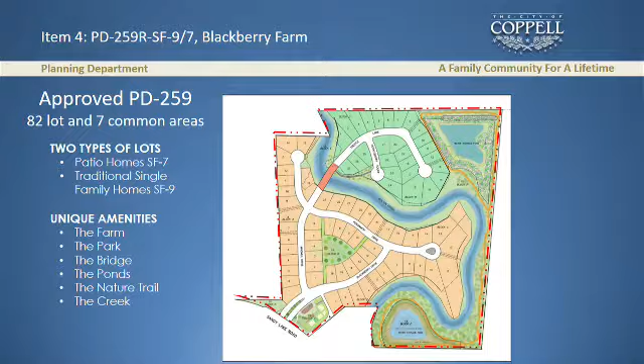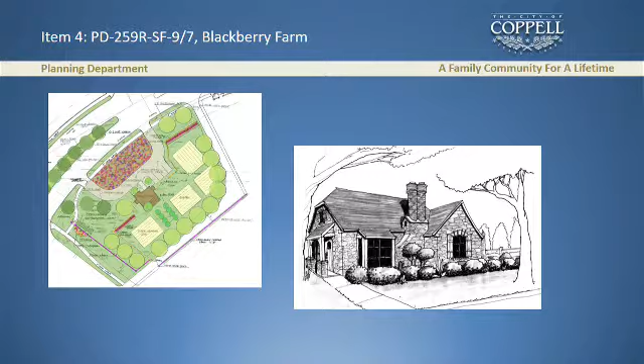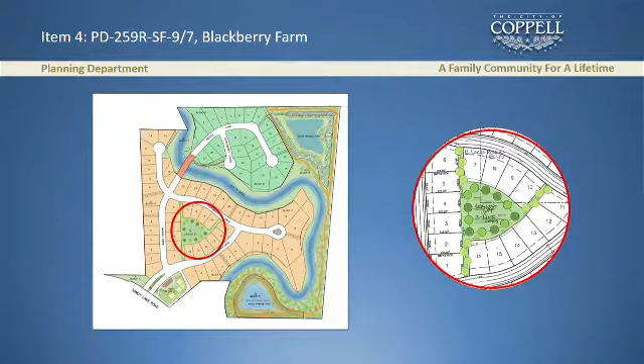One of the key entry features of this development was at the entry right at Sandy Lake. There's just over an acre of land where there was going to be a farmhouse with gardens and limited parking. That proposal is part of the current development and needs to be attached to that. Another part of the existing development being brought forward is another focal point in the middle of the development - about an acre of land, which is going to be basically a green, grassy area.

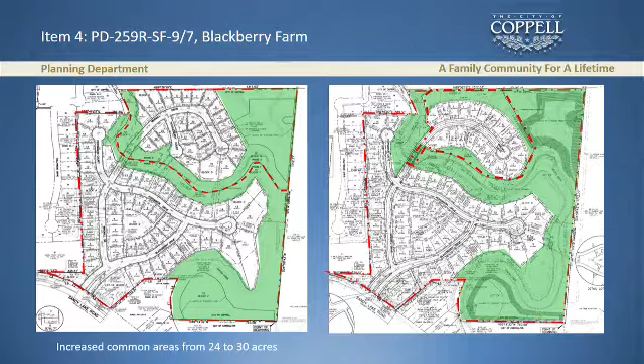Again, another significant difference is phase 2, which is north of the creek. They reduced that by 7 lots to 20 lots, and the lots are a lot larger than before because you're incorporating more green areas. There's kind of a long list of just technical minor issues that were revised with the existing PD.

This existing PD and the proposed PD - there was a requirement for 3-home separation between stucco homes. That's been deleted. There are some words about allowing for detached buildings in the front yard. I think we can work through some of the wording; I think I understand the intent of that, but it really just needs to be reworded.

The original PD had an option for rolled curbs. They no longer want those. There was a hike and bike trail that was going to be internal to the site - you can kind of see it through here - that's no longer part of the request. And we'll talk about the bridge too: it was supposed to be a dual arch bridge, and now it's going to be a single arch.

And elimination, at one point there was some discussion about a pedestrian connection between this subdivision and the subdivision to the west, but my understanding is that agreement never occurred.

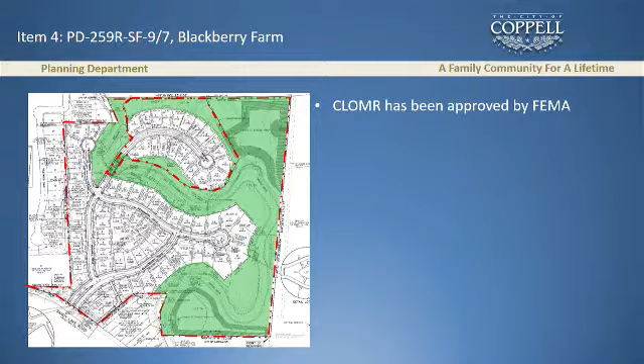So again, what's before you this evening is this detailed plan, and since we've last seen it, the CLOMR has been approved by FEMA. Basically, the floodplain study has been approved. Part of that approval, the single-family lots no longer extend into the floodplain like they were before.

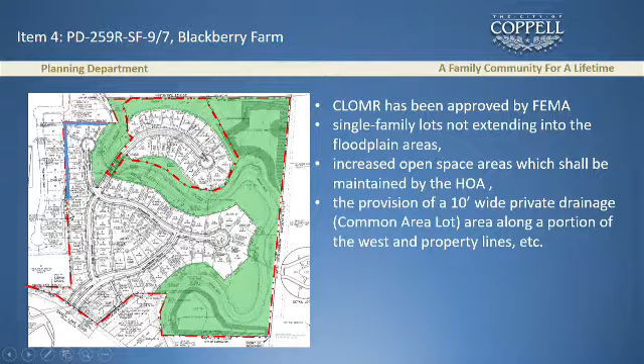As we talked about a minute ago, there's increased acreage of open space area that is going to be maintained by the HOA. Along this property line adjacent to Hollywood Boulevard, or Hollywood Road, there is a 10-foot wide private drainage, basically an X lot, that's going to accommodate overflow drainage if needed.

However, the one outstanding issue that's hopefully close to resolution is about the U.S. Army Corps of Engineers providing stream bank erosion protection. There's still some discussion with the city and the Corps on that one final issue, but zoning can move on since the plat will be held up until that's resolved.

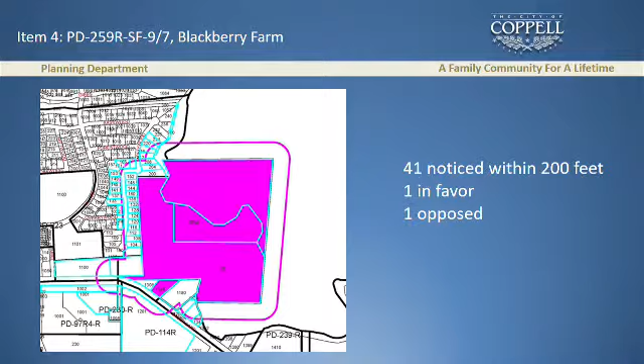This case, we did send 41 notices to property owners within 200 feet, only received 2 responses in writing, one was in favor and one was opposed. I received a couple phone calls. And then within 800 feet, we sent out 96 notices, but received no written response from that.

So that being said, staff is recommending approval of the PD 259 revised SF 7 and 9, subject to conditions as revised in attachment A, which is in your packet. I also have a slide of that.

But basically, the 3 outstanding issues was just to ensure that the entry feature common area that I showed you is attached to this PD, and that the development of that lot and the entry features be constructed prior to the issuance of a building permit for the first home, other than a model home. And then I think we talked a little bit about the hardscapes in the front yard, how we're just going to wordsmith that. And then prior to the filing of the plat for Phase 1, again, the U.S. Army Corps of Engineers approved stream bank erosion protection.

But on phase 2, there are no retaining walls, because we're just going to roll it down on a 3-to-1. I'm sorry, yeah, there's no retaining walls there, we took all of them out.

The previous PD had all retaining walls around that complete yellow phase 2. Now the new one has none, which I think is good. It's less to maintain, and I don't think there's any concern that that's going to erode. There's not, in our mind, or I haven't heard staff think there was either.

And the same thing on those 4 big cul-de-sac lots where it backs up to the peninsulas. There are no retaining walls because I think it's better if it just goes off in a 4-to-1. I hear the argument. My concern coming in, and I'll just key off, I was going to let it lie, but I'll key off of what Freddie's saying.

If you're coming under phase 2, as you're coming around Block C, which is the persimmon, come down and to the right, that curve right, come up to the right, you're at the retaining wall above those lots, right there. So if we get to a point that water is outside the channel and it's up against the retaining walls, when it hits that point corner where the retaining wall stops, water's going to be on the wall and coming around that wall into that lot, I think you can potentially get some eddy currents.

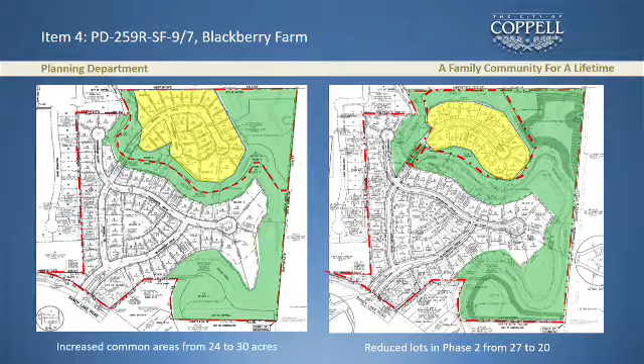I have a little concern if you're in a flood situation and the wall's doing what it's designed to do, which is to stop bank erosion. It's worked well in other areas. We see stuff in Euless or Arlington where these retaining walls are actually stopping erosion. It may not have helped the homeowner before, but now they're working.

So I understand your argument, and the channel is directing away from it, but maybe turn the corner with the walls, taper it down, do something so it's not a sharp stop and eddy right there. Yeah, I'm not opposed to it, just a suggestion, but ultimately it's going to be up to the builder and the homeowners if there is an event and it floods. But those are deep enough lots that I'm not generally concerned about it eroding all the way up to the homes. That's my thought on that.

One last question too. I guess regarding the homeowners association, obviously they're going to be responsible for maintaining or stabilizing the system. So typically in your past experience, how has that worked, and what's the funding needed for that, for typical repairs? Just some examples.

Okay, so we've never done one like this, just to be honest with you. Very few have been on this active of a creek. But I have seen—I think it's something that we fund, and I'm not sure it'll ever get used, but sometime it might, and it's probably just a growing pot that may never get used. But I think it's got to stay there forever.

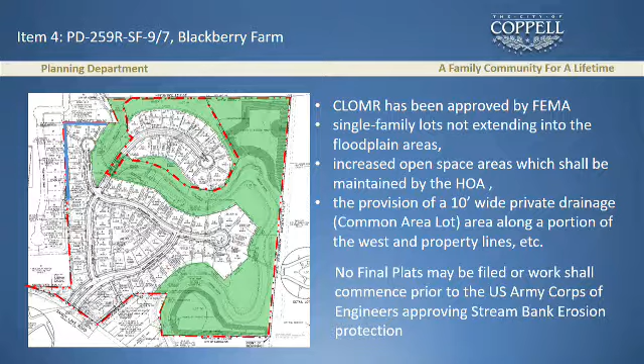Okay, we have a motion by Commissioner Portman. Is there a second? Second, Commissioner Guerra. All in favor, please raise your hand. Robinson, Maurer, Haas, Portman, Guerra, Blankenship in favor. None opposed, the motion carries.

Thank you for the discussion. Thank you for the comments from the public. It is always very valuable to hear input from the public.

So as we move on to item 5 this evening, the second item on the agenda, or should we adjourn for the evening? No, I'm teasing. All right, item 5, consider approval of the Blackberry Farm preliminary plat. Sorry, wrong one. No, sorry. I'm sorry, okay, all right, let me reboot here.

Item 5 on the agenda, consider approval of Blackberry Farm preliminary plat, a revised preliminary plat to subdivide 54.8 acres of property to permit the development of 74 single-family lots and 9 common area lots located on the north side of Sandy Lake Road, approximately 750 feet northeast of Starleaf Street, at the request of Denton Creek Land Company Limited and Blackberry Farm Limited, represented by Lynn Cadlick of Cadlick and Associates. Marcy with the staff report.

Again, this is a preliminary plat that looks a whole lot like the detail plan you guys just looked at. I'm not going to go through all the details again, but the conditions on the plat basically address a lot of what we're talking about in terms of who maintains what, retaining walls, and this and that. There's 10 conditions already on the plat. Staff is recommending approval of that plat with a few additional conditions.

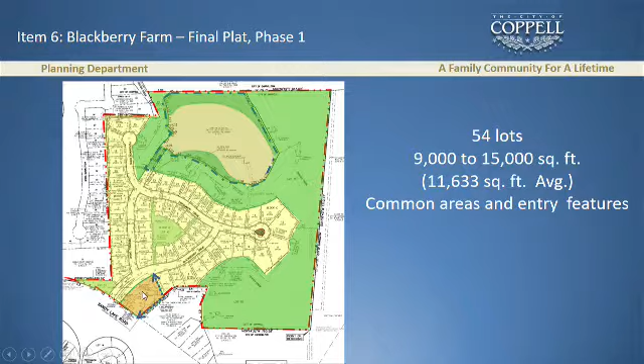We didn't talk about this much, but this is where the farm area is going to be. Part of that, there's going to be a private drive that runs from the street down to Sandy Lake basically for emergency access. That was negotiated when the zoning came through, and these will be built with the first phase of development. These are the same conditions we just saw, but we want them all reflected on all plats. Staff is recommending approval of final plat Phase 1, subject to the same conditions.

So, what about that sidewalk? I would like that sidewalk to be built in conjunction with this Phase 1, so it's in place, whether it's the city or developer participation or what. I'd like that noted on this Phase 1. My understanding is that we anticipate the city will be building that sidewalk. So would you like that prior to the first certificate of occupancy for the first home?

How would we normally do it? I just feel strongly about the sidewalk being in place, because whether it's the first home or the 10th home, if there are kids going to and from school, there needs to be a place for them to walk. Right. It's always a little tricky to require off-site improvements that aren't adjacent to this property, because there will be sidewalk adjacent to the property which he has control over.

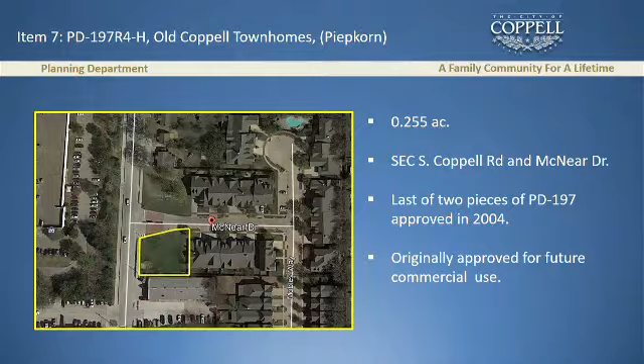What they're planning on doing is actually do a live-work unit on the property. The applicant is looking to do one live-work unit with a photography studio on the first floor, dedicated conference room and office. In addition, on the first floor they will have a bedroom, a kitchen, and a living room that will serve as a flex space as well.

With this development, we're looking at 4 on-street parking spaces, 2 driveway spaces. So here's the 4 on-street, 2 driveway, as well as a 3-car garage.

In order to achieve these 4 parking spaces, they are proposing to provide a sidewalk and parking easement on the property. With this kind of development, because it is less than 2 acres, typically they are required to provide about 30% landscaping. With this proposal, you're looking at 58% of the site being landscaped with grass, trees, shrubs, and ground cover, as outlined on the exhibit.

They're going to save about 2 trees that are on site and provide an additional 8 trees.

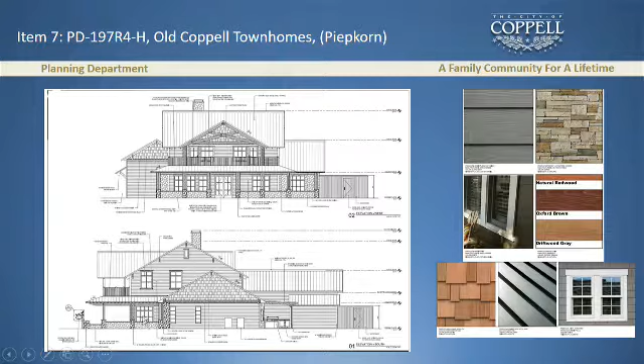This is the other 2 facades. So this is the rear of the property. They will have an outdoor covered patio area. This will be the garage area.

This is the side elevation, or the north elevation. This is the facade that will be out on McNear Drive. So you've got a 3-car garage area. The stone carries through, as well as on the upper floor you have the hardy board.

We did send out notices within 200 feet and 800 feet. We received one response in favor, from someone who lived on McNear. We received one other response with concerns about parking and screening, and that was on Mobley Way.

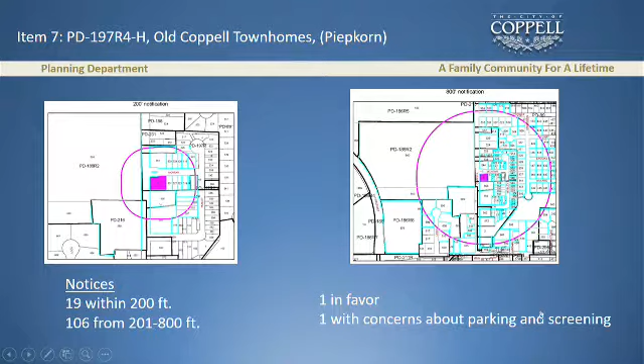Because the rear of the home, the rear of the property will be pretty much residential, staff has no problem with the proposed wood fence. Again, in this area here, it'll match what's existing, and if there has to be some kind of access or maintenance to get to the adjacent property, I think a wood fence would make more sense versus some type of masonry screening wall.

Staff is recommending approval of PD-197R4-H, Old Coppell Townhomes, Lot 1, Block B, subject to the following conditions: there may be additional comments during site plan review, a replat will be required to grant easements and right-of-way dedications, all proposed signage shall comply as shown, and any new signage shall comply with ordinance requirements, to allow an 8-foot wood fence in lieu of a 6-foot fence.

And one other thing would be to have wood garage doors provided in lieu of metal doors. With that last one, they are providing wood doors for the actual front doors and side doors. With the garage facing McNear, it would be nice that it matched and be wood as well. Do you have any questions?

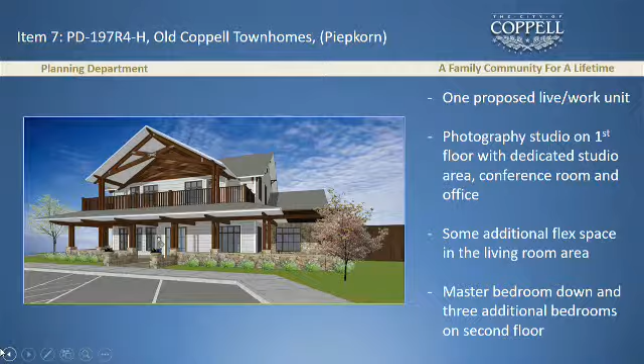One thing I would mention on this one, I have more comments on item number 8 when we get to that, but the fence you discussed back behind, that lot backs right up to the window of the house back there. It's always been like that, and the buyer just recently bought that and knows that. But you say there's going to be like a 5-foot walkway through there?

Get into it, yeah. So the people who live in that house in the HOA will need access to get into that backyard if there's an emergency. Also, the three or four other houses attached to it, if there was a fire in between any of those houses, they've got to get out through each of those backyards, either on this end or the far end. So there needs to be an emergency way to get out of there. So that was my concern.

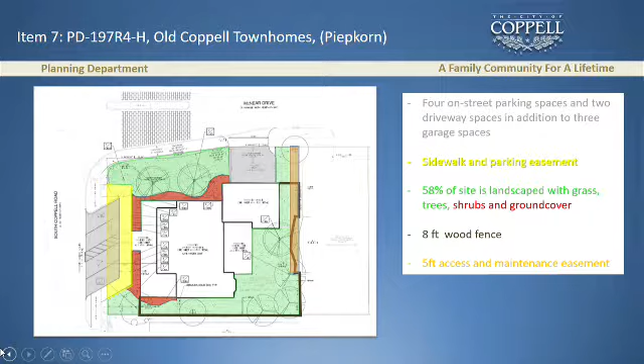The garage on the side, I think, is fine. And you mentioned we do have that very large entryway sign with an entrance and exit. So turning in there and getting into the garage, I don't think there'll be a problem backing out.

I'm glad you mentioned no parking. We'd like to see no parking on McNear, as it was in the Heath deal a couple of years ago. If someone's parked on McNear and an emergency vehicle or fire truck came through, and those houses are so close together with not much driveway space, parking's a real problem. Our common area parking for the HOA only has about 8 stalls on our end.

And you said there's going to be a sidewalk out front? Yes, sir, on South Coppell. Right, so the sidewalk would come over here, come up this way, back down, and cross the street. Yeah, because we just recently finished South Coppell Road a couple of years ago and got a sidewalk there, so we don't have to jump in the ditch to go to Old Town. We want to continue to see that.

Thank you very much. So either I'm getting tired or something, but I kind of got lost on the comment about the fire access. I think he was talking about this commercial building behind, they're attached.

He wants to make sure that's the way the emergency crew would have to get in also. They're going to have to go into those backyards.

So the houses here, if I can clarify, the fence in black is how they designed it, and we're going to ask them to bring it 5 foot in, be a straight shot, and cut over past the house. No, just an easement. The fence stays there, but it's just an easement. So the fence currently goes to the edge of the house right here.

And right now, this is all a big open field. So we're asking for a 5-foot easement here so that they can get through, because there's going to be a gate over here, so that if they need to come in this way. I think their patio and side entrance is here, so we can probably tweak this a little bit, but they should have enough access, like back here and over here, to go.

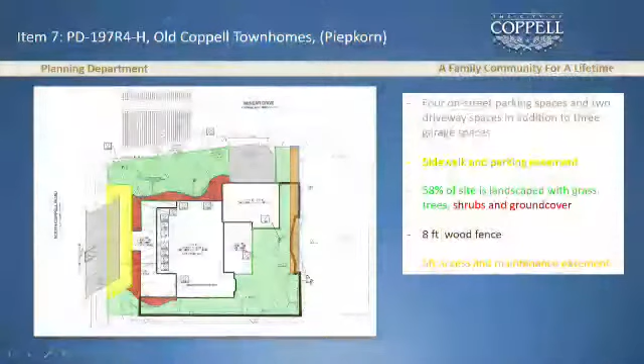But right now, the existing fence, in the bottom right corner, has a gate that the homeowner has installed there. We've talked about possibly just leaving that there in the event, hoping they just don't trespass when they feel like it, but in an emergency it's something that is obviously okay with us.

I kind of feel it's onerous on y'all, but that's just me. And if there's an issue with fire, it seems to me folks can get out the front door, as opposed to going around the back to an easement and a gate. But this is more for if they're in this room and can't get out. Well, for that particular property, for the other townhomes, you go out a window, you find a way out the backyard. Yeah, understand.

Mary, did I understand you to say that you consider that 5-foot easement as drawn adequate to handle an emergency from the window or from the rear of those 4 townhouses?

I was just considering this property here, and for the window, this is what we were looking at. Typically, when you have something adjacent to the property line, there's typically some kind of easement so that they can maintain their property and for emergency purposes. And you think the 5-foot works?

This is your house we're talking about. I'm Debbie Elliott, I also live at 542 Mobley Way, a few doors down from this structure. I agree, it's a lovely structure. First time I'm seeing it, I'm impressed. One thing, the theme of the night seems to be sidewalks, and I'm going to continue that theme. I love seeing the sidewalks cut around the parking stalls on South Coppell. Old Coppell townhomes waited a long, long time for sidewalks to Old Town. We had to beg and plead, and finally we got them, except that little place on McNear, next where their driveway is going to be.

The city never put that sidewalk along that side that would lead up to the corner. That will happen with development. So with this development, when we walk, we always have to go out in the street. We go to where the house is that it's going to abut this structure, then we have to go out in the street and walk to the corner to get to the sidewalk. And with all the activity down in Old Town, it's great to walk down there on a Friday, Saturday night.

We see families on Saturday morning going to the farmer's market down the sidewalk. Some are even cutting through Hunterwood Park, coming through our neighborhood because of the sidewalk access now. And it's great, but that one little strip still does not have a sidewalk.

I think it's on there. On McNear? Yes. So all sidewalks are built when the project is developed. So is it on the picture there? Right, that white piece. So it's going to go like this. No, I'm talking McNear. Right, I know, and then come around this way. So that connects, and there's a sidewalk there.

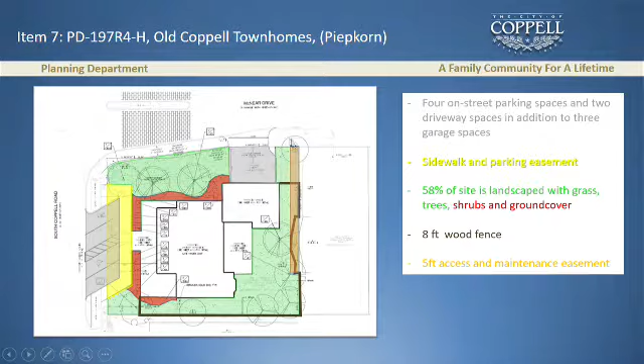Oh, okay. The other question I had real quick is, if I understood correctly, the first floor did have some living space in it, is that correct? Correct. So is there anything that prevents the owner from renting out the first floor living space? Good question. Well, the way it's designed, they have a bedroom, a kitchen area, and laundry facility, and then additional bedrooms upstairs. So it's not a separate unit.

Well, my understanding with live-work was the living part was upstairs and the work part was downstairs. But this combines the downstairs to a living space too? The master is downstairs, so the large closet and large bathroom with tub and shower are there. And then the upstairs bedrooms are smaller, more of a guest room or could be for kids.

So it could be rented out if the owner wanted to, the first floor living space? No, because there's no kitchen or anything on the second floor. They're just bedrooms upstairs. So, I mean, it's like any other typical two-story house.

I think our fear is apartment style, because we've seen developers trying to slip that in the past. Well, this isn't designed to accommodate that because you don't have any kitchen facilities upstairs. So you couldn't rent those out as apartments, and downstairs they're interdependent, to put it that way. That's all I have. Thank you.

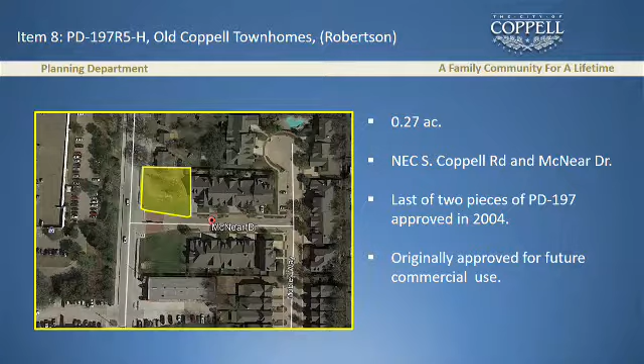Commissioners, this is the second half, or complementary piece, to the last case. This is actually at the northeast corner of South Coppell Road and McNear Drive. This also was originally approved for future commercial use. The proposal for this site is to actually replat it into 2 lots for 2 individual live-work units. This one's a little bit different in that these will have a spec interior, with a final layout to be determined when they have a purchaser. So what we're looking at is the site layout as well as the elevations for the property.

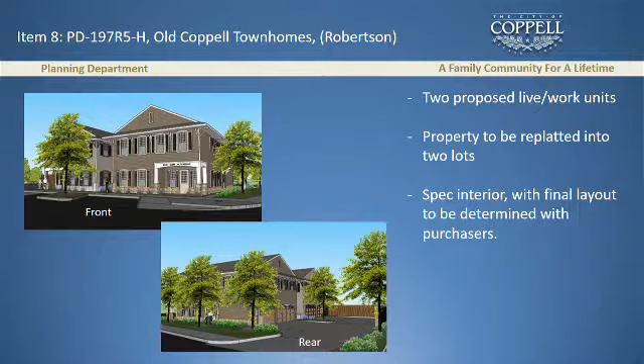So as I was saying, this would require that the property be replatted into 2 lots. Similar to the last case, there would have to be a sidewalk and parking easement. This would also allow for 4 parking spaces out front on Coppell Road and more at the rear of the site. Both units would have a 3-car garage, so there would be 3 behind each garage.

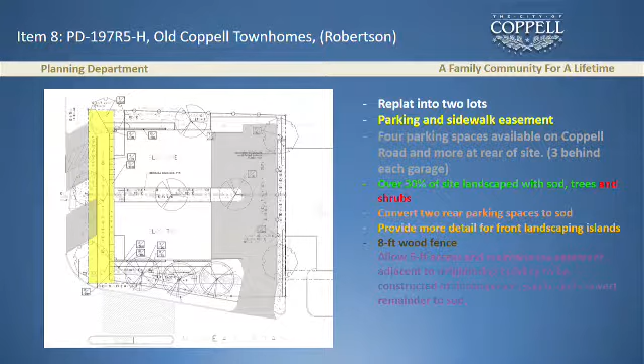Again, this property is less than 2 acres, so they do meet the 30% of the site being landscaped with sod, trees and shrubs, as illustrated.

On the proposal, they did show 2 additional parking spots, one over here and one over here. Staff is of the opinion that these aren't really functional in terms of backing out or trying to turn into them. We would rather see that these 2 spaces be converted to additional landscaping on site. We would also request that they provide a little bit more detail in terms of the landscaping in the front islands. We just need to work on some clarification on what's going to go in there.

As with the last proposal, they're proposing to provide an 8-foot wood fence. As you can see, it goes from the edge of the building here along the north property line down this way here. As with the last project that we looked at, this one basically has the entire side of the house on the property line.

So as with the last proposal, we are requesting that a 5-foot access and maintenance easement be provided adjacent to the neighboring building. They're looking to make this entire area decomposed granite, and we are requesting that only that little piece in purple where it's actually adjacent to the building behind the fence be the granite, and that they convert the rest of it to sod and other landscaping. This is basically the front here where you have a garage, so we'd like this piece to be converted back to sod.

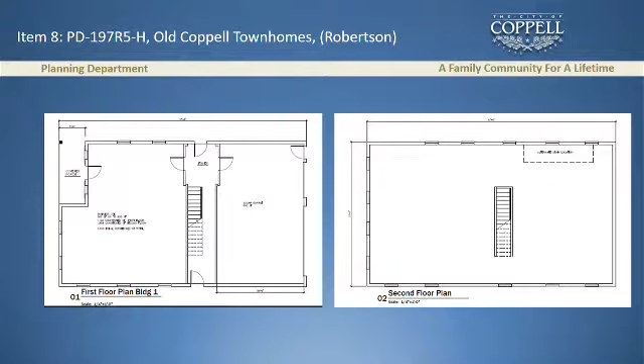In terms of the exterior facade, both buildings would be mirror images of one another. So Marcy's handing out the material boards. The colors are different but complementary. Both buildings basically share the same architecture, have gabled roofs with shingle roofs. They have vertically oriented windows up front. There's a covered little porch area with wood pilasters.

Stone wainscoting area that goes along the front and both sides. Once you get to the rear of the building, you've got 3 garage doors with another side entry or a back entry door. On either side, you've got a covered entryway, as well as Hardie board siding for the rest.

So like I said, on building 1, here's the entrance. Building 2, it's just flipped on the other side.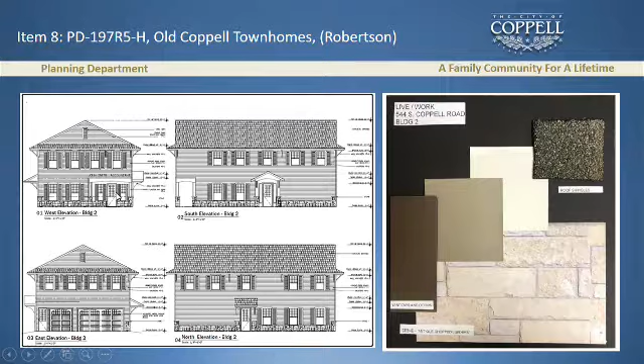We did send out notifications. We had the same replies as for the first application, one in favor and one with the same concerns about the parking and screening for both items.

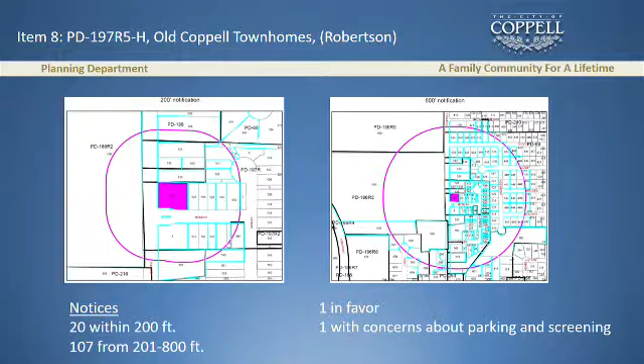Staff is recommending approval of PD 197R5-H Old Coppell Townhomes, Lot 1, Block B, subject to the following conditions: one, that there may be additional comments during the building permit and detailed engineering review, that a replat will be required. Three, that all proposed signage shall comply with ordinance requirements. Their illustration showed some signage, but that was just for illustrative purposes. That wood garage doors be provided in lieu of metal doors.

Additional landscaping for the parking island on Coppell Road. Removal of 2 rear parking spots and replace them with sod and ground cover, as well as providing sod, ground cover and shrubs along the rear portion of the lot outside of the fenced area, to allow an 8-foot fence in lieu of a 6-foot fence, and to provide a 15-foot setback along McNair Drive. That last one, the house that is closest to the corner,

the lot is slanted here, so I think just the corner here is about a foot and a bit, doesn't meet that 15-foot setback, so I think all they would have to do is just move it slightly, so they've got some room to play with over here.

Do you have any questions? Thank you, Mary. Questions of staff? Doug?

In the PD, they provided elevations. Is that written in stone? If we approve it that way, could someone come in and change it? Could staff work with an applicant to change the appearance? We have some latitude to do minor revisions, but if it's going to look 100% different, then we would probably bring it back to y'all.

Okay, what's your thought there, Doug? Well, the floor plan's going to have to come back anyway. No, the floor plan, if it meets the requirements of live-work in our building code, we probably won't see that again because that's internal to it. Gotcha. Was it tied to the floor plan, or was it tied to the look and feel?

No, I'm just thinking, we just got through with Block B, and so the owner that wants to buy this comes out and says, I like that look, I want to change it up. What latitude do they have? And I'm fine with that, if they want to change it they can bring it back. I mean, minor modifications we'll look at, but if it's not going to look generally like that, then you'll see it. Any other questions of staff?

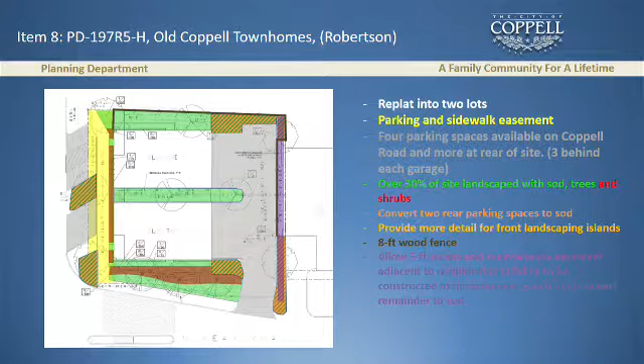So I'm still bothered by this 5-foot easement deal, only because this is a little different. In the first case, it's their backyard. This is kind of the backyard, but this is basically a driveway. I'm not as bothered with this one as I was with the first case, but how did we get ourselves into this, where we're having to allow the neighbor accessibility on the applicant's property to be able to go around? I just don't like that one bit, but that's just Eddie talking. So otherwise, I think it's fine.

Of the two styles, I think this is a good-looking application as presented. The first one, totally different flavor, but they're both very nice. They'll be fine additions, I think.

So, any other comments by the commission? Is there a motion? I was going to say I agree with you on the easement. I think it should be a little larger, but I'm just bothered with it altogether. Okay, so is there any other discussion, or is there a motion?

So I don't know, are you going to recommend that? I'm going to recommend that we allow staff to do this. And if we need to reopen item 7 to maybe amend that, I didn't know if we needed to, or if we approved it showing the 5-foot easement, if it would have to be.

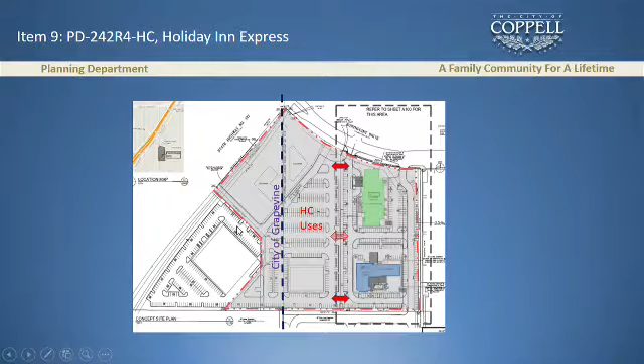These plans have been set up to provide for mutual access easements from this property to eventually get to the freeway. If you remember, within last year, we did approve an aloft Hotel on the southernmost tract of land. It's going to have 140 rooms, 4,000 square feet of meeting space. To provide for the parking for both the rooms and the meeting space, they were required to have 180 parking spaces. To accommodate that, they had to actually replat their property to allow them basically to do some of their first phase parking, which kind of infringed on their second hotel site.

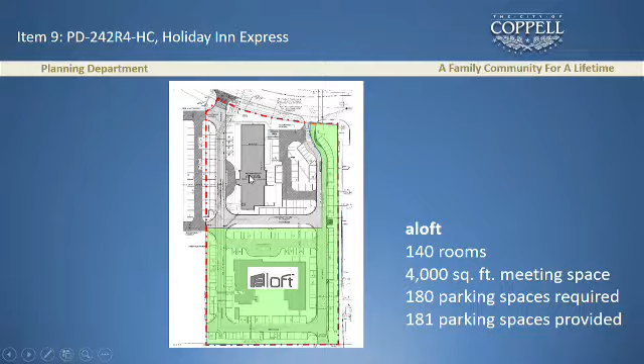So what's before you this evening is a Holiday Inn Express, which is a 5-story hotel again with 125 rooms. To accommodate additional parking spaces, they actually had to purchase a little bit extra land to allow them double row parking.

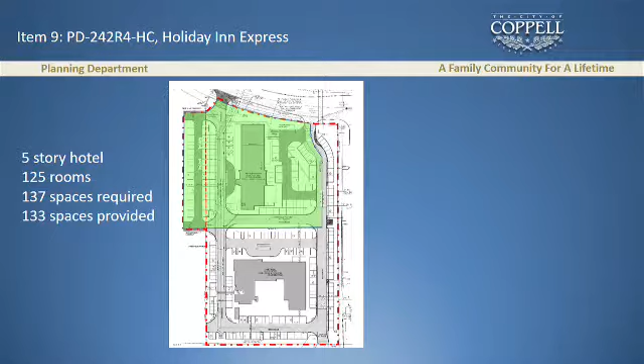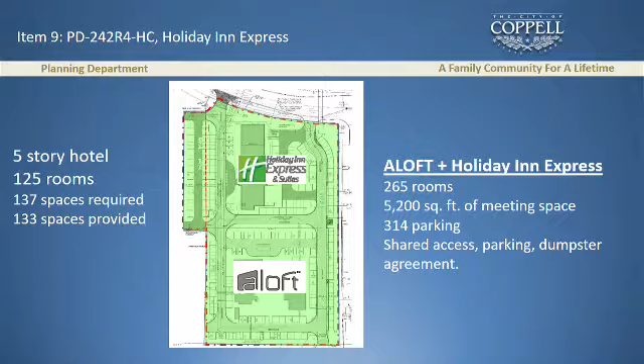They are required to have 137 spaces based on the room count in the meeting areas, but they are requesting 133 spaces. However, if you add the aloft and the Holiday Inn parking together, you have 265 rooms and 5,200 square feet of meeting space, for a total of 314 parking spaces. These developments have shared access and dumpster agreements, so we're comfortable that a four space shortage is not going to be an issue at this property.

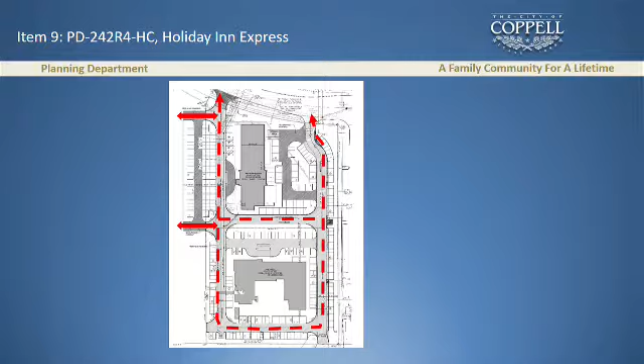When the first phase was developed with the Aloft, we required them to build all of the fire lanes with that first phase. My understanding is that's pretty close to, if not currently, under construction. With the second hotel, as mentioned, we will set up mutual access so you can get back to 121 eventually.

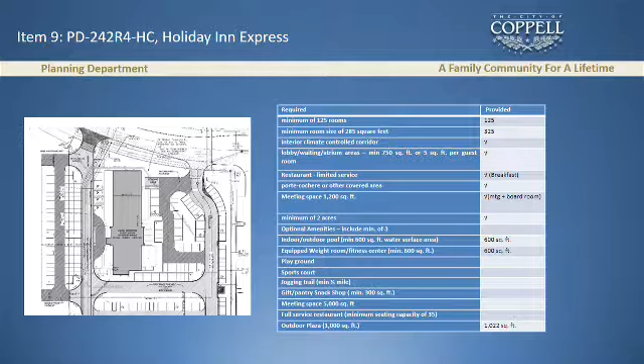The hotel meets all of our hotel standards under the new ordinance. The only place they're exceeding it is that the minimum room size is 325 square feet versus the 285 required by ordinance. Here's a look at the first floor plan, where they meet the requirements of the ordinance, with right at the 1,200 square foot meeting room. Actually, they have a boardroom and a meeting room. They also have a small breakfast area, a 600 square foot fitness area, and an outdoor patio.

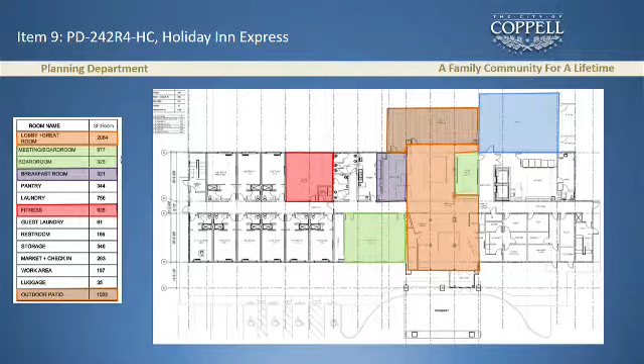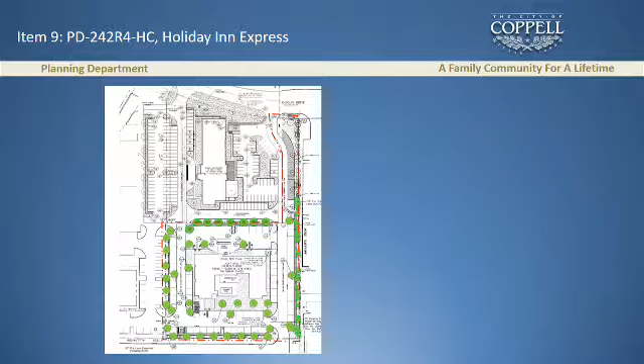The only issue is that when they came in with the landscape plan on this site, they were showing the same trees. Our perimeter landscaping requires basically 10 feet on both sides of the line, with 5 trees on each side. So altogether they need 10 trees adjacent to that common property line. They are providing, I think, around 43 trees on the rest of their property.

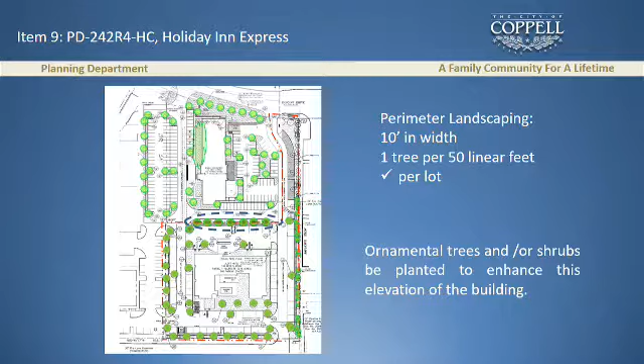Staff is suggesting that in front of their building, where they're just showing ground cover, it would be really nice to have some ornamental trees, shrubs, or something to dress up that front facade. These are the building elevations, and Mary will pass the color board around.

Again, this is the new prototype for the Holiday Inn. It has basically 3 shades of red brick, which meets our masonry requirements. The signs do appear to meet the size requirement of our sign ordinance. This is the one that will be facing 121.

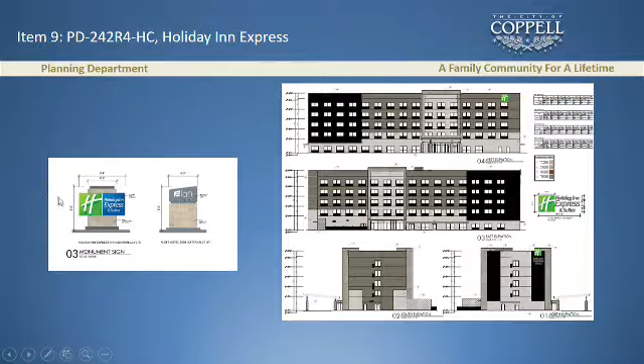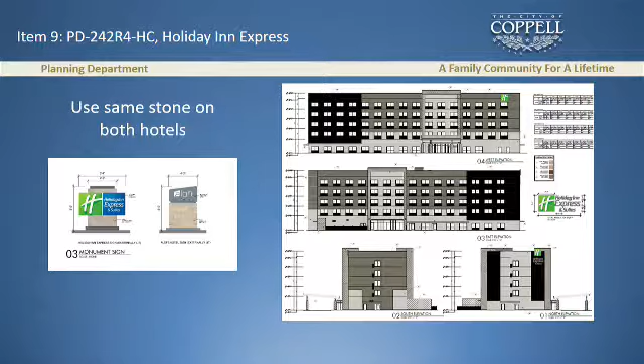They are now requesting a monument sign for both the Holiday Inn and the Aloft on their respective lots. Staff understands that each hotel has its own branding needs, but since both were having some type of stone accent and they were kind of similar, we're suggesting they use the same stone accents on both, just to be somewhat architecturally compatible without detracting from their overall branding. With the 2 monument signs both having the stone, it would be nice to know that these were planned together.

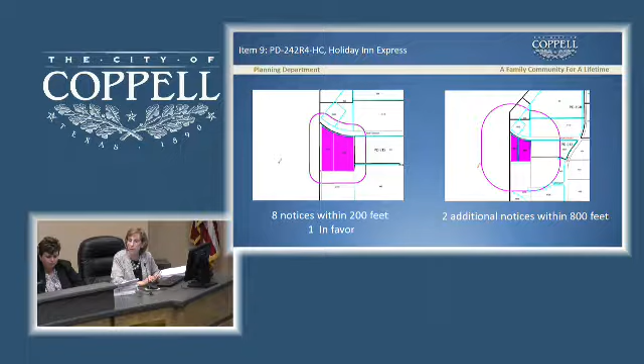The signs appear pretty close, but we want them to provide additional details on both the attached and monument signs to make sure they comply with the ordinance, such as being externally lit and not plastic. We sent 8 notices to property owners within 200 feet and received 1 response in favor, plus additional notices to properties within 800 feet, receiving no written response.

Therefore, staff is recommending approval of PD 242R4HC Holiday Inn Express, subject to the following conditions. Our first standard condition is that there will be additional comments during detailed engineering and building permit review. Also, this property will be required to be replatted, since we've added some land into this, prior to the issuance of the building permit, to incorporate the additional land and reflect existing and proposed access, fire lane, utility easements, and parking and dumpster facilities.

As we talked about, they need to revise the landscape plan to provide the 10 overstory trees within the 10 feet on that common property line, provide additional details on the attached monument sign, and there were just a few drafting issues on the site plan where we wanted them to include the proposed easements, but not really the utility lines themselves.

Remove the notations by this plat on the fire lane and mutual access easement, and finally remove the fire lane notes and the hatching which encroach into the parking spaces along the east property line. I'd be happy to answer any questions you may have.

The applicant and his consultants are in the audience. Very good, thank you Marcy. Any questions of staff by the commission?

Freddie: I just had one quick question. In regards to the A-loft, what are they doing in regards to ornamental trees and shrubs along their front elevation of the building? Do you recall? This is their landscape plan. They do have trees up in their front elevation.

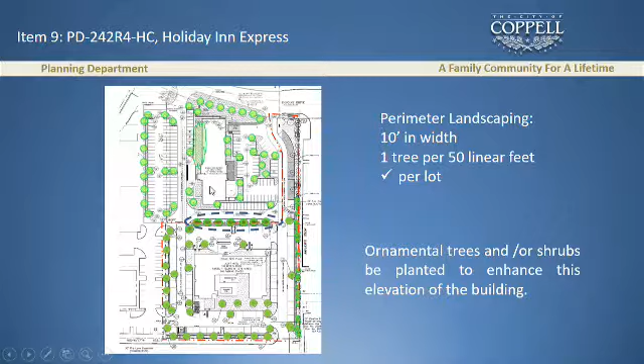Any other questions of staff? All righty, is the applicant here to present the case?

Hi, Suki Patel, 768 Lexington Avenue, Coppell, 75019. Thank you, Commissioners and Mr. Chair and Vice Chair. We are in agreement with all the recommendations that Marcy has provided. We will have the additional 3 trees on there as well.

There's going to be additional shrubs that the franchise will also require us to have. They usually want a certain type as well, so we usually wait for them to rebuttal no matter what we do, so we know that's going to happen. Same thing with the A-loft. So we have no issues with any of the recommendations. Drafting issues we have just about complete as well. So we are fine with all the recommendations. If you guys have any questions, I would be free to answer what I can.

All righty, very good, thank you. Any questions of the commission or by the commission?

Oh man, you sat through all this. I know, I'll make the comment Marcy.

We've touched this many times, but I do appreciate you making the Holiday Inn Express larger. We were talking about getting the A-loft maybe scaled down, so I think it's good that you're meeting all the requirements for the Holiday Inn Express as well. Yes, I mean we wanted to meet as much of it as we could. We had the additional land, and I think we're meeting just about all of the parking requirements, but a little bit... we sacrificed a little bit of parking for more landscaping, I guess.